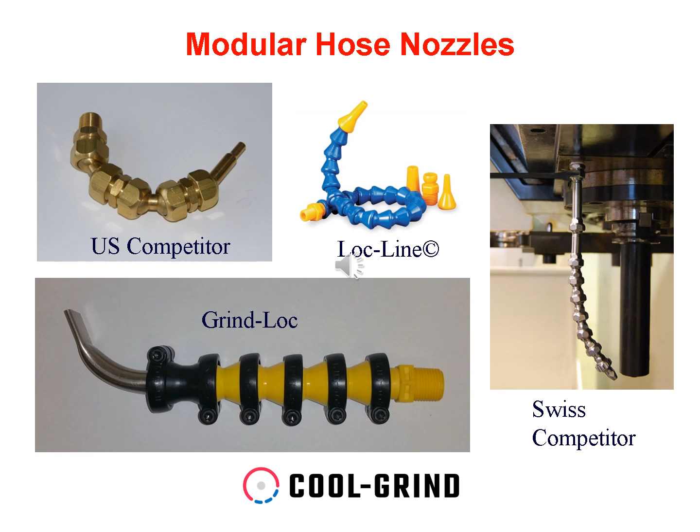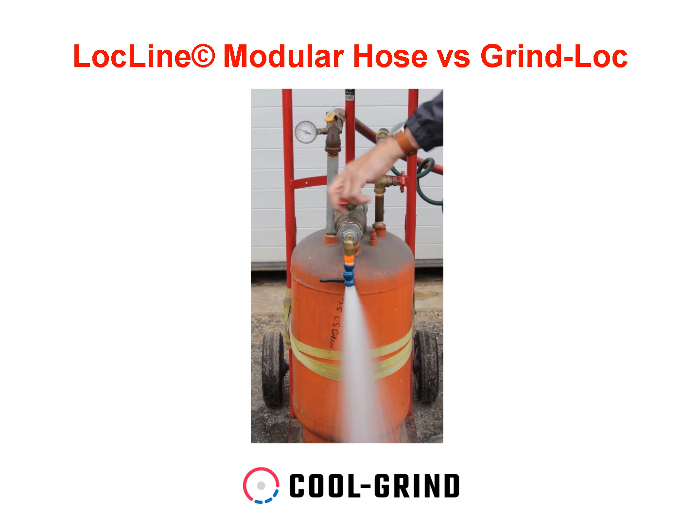Grinding machines tend to run at higher pressure than machining processes. So when you're trying to use LocLine on these machines, if you have a pressure, say, of 4 bar at the manifold, then you can have issues with the nozzle moving, or in the case of the example here, the nozzle came off. If we lowered the pressure to 2 bar pressure, you'll see what happens, and that's about 30 psi, and the nozzle tends to move, but it doesn't come off the machine.

You can get clamps for LocLine nozzles, which does significantly help the situation. Here we're testing now at 1 bar pressure, which is about 15 psi. And the nozzle does stay in position, so that's great, but at 4 bar there would be an issue unless you use clamps. The next product here is Grind-Loc, run at 7 bar, which is about 100 psi. And you see the nozzle does not move, it stays in position. But it's a smaller nozzle, so a bit of hard plumbing really helps.

This slide shows the range of nozzles available within the Grind-Loc Modular Hose system. There are now more nozzles than shown because we invent new products all the time. We've got a much bigger, wider nozzle, which is not included there. But you can see it's very modular, just like the LocLine.

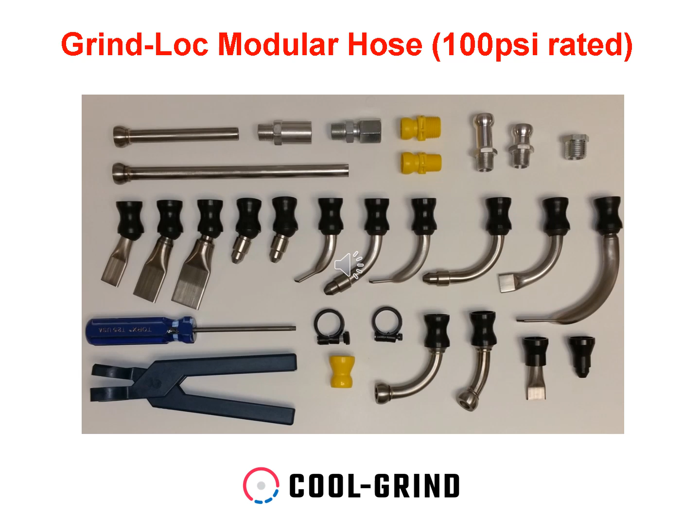When rigging nozzles onto a grinding machine, it's difficult to know exactly how many parts you need. And the Grind-Loc Kits allow you to have a lot of extra pieces there. This is a 15 nozzle kit. It has many adapters and steel pipes that can be put into a pipe bender, various clamps and threaded ends that you can go into the manifold, telescopes that allow adjustment for wheel wear, etc. And this is a much more convenient way to be in front of the machine and invent your solution.

This slide shows the before and after on a grinding machine. On the left-hand side, you can see LocLine coming out of the 6 ports. The nozzles were taken off by the customer because they created too much pressure and the nozzles moved out of the way. And the first joint was the one that was always moving because of the greatest torque as a cantilever.

In the middle view, you can see I've got hard plumbing and long extension tubes that go into the ports because in many machines, the wheel is in a very similar position and just needs fine tuning of the jets to hit the sweet spot on the wheel.

And the right hand view as well, you can see that we've got telescopes as well, so if the wheel pack changes and the spacers are changing, you can just push the nozzles in or out and get them in the right place. But it just shows you, and the stiffness as well from the hard plumbing makes a huge difference to the pressure rating.

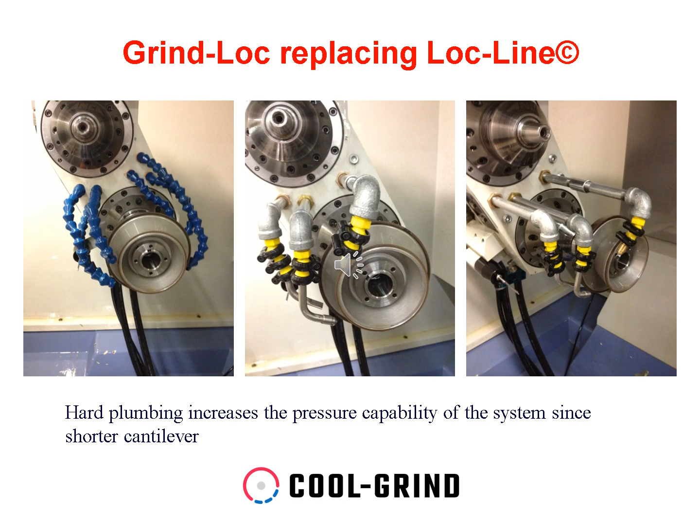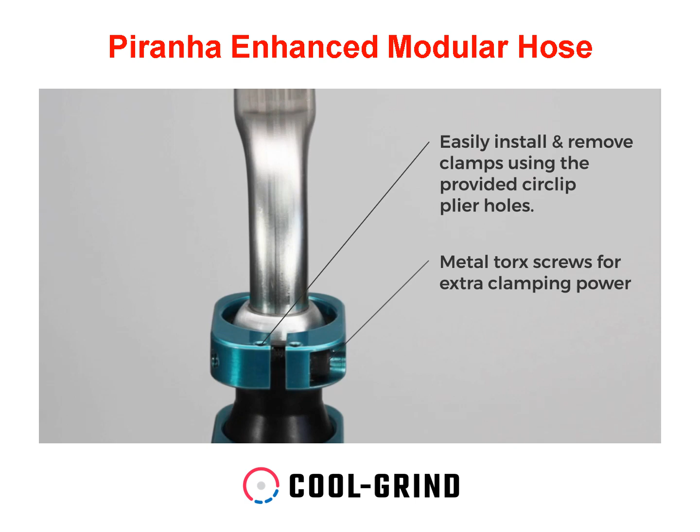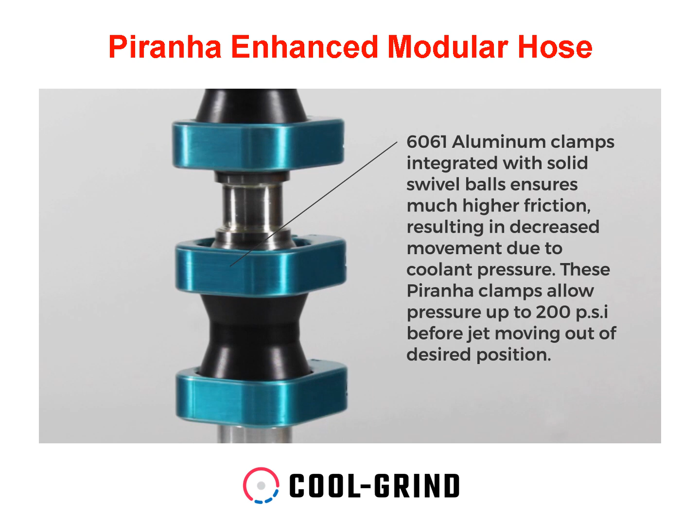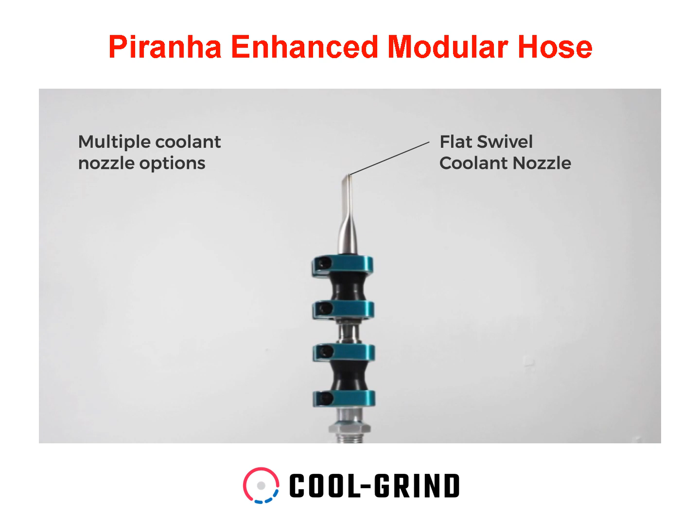Piranha is a high pressure version of Grind-Loc. You've got special metal clamps to give high clamping pressure, and up to 200 psi is available from the jet before it will move out of position. There's various nozzles that can be integrated into the Piranha system. They should have metal balls, and that's one of the features of the Piranha: the plastic black couplings onto metal balls give that high friction that gives you the higher pressure capability.

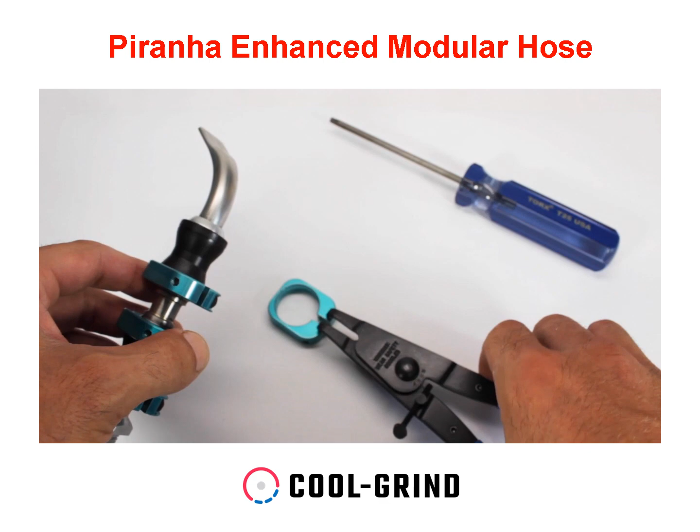Here you can see that a pair of circlip pliers are used to assemble the clamps, much easier than using your hands, and then the screw goes in. It's a Torx screwdriver, and then it's ready to fire up. You can see a very neat arrangement and very strong.

The donut system is a sub-manifold system. You can see it fitted to a cylindrical grinder. We have the hose coming in from the left into a right-angled elbow and into the donut assembly. There's an adjuster arm in this particular case to compensate for wheel wear.

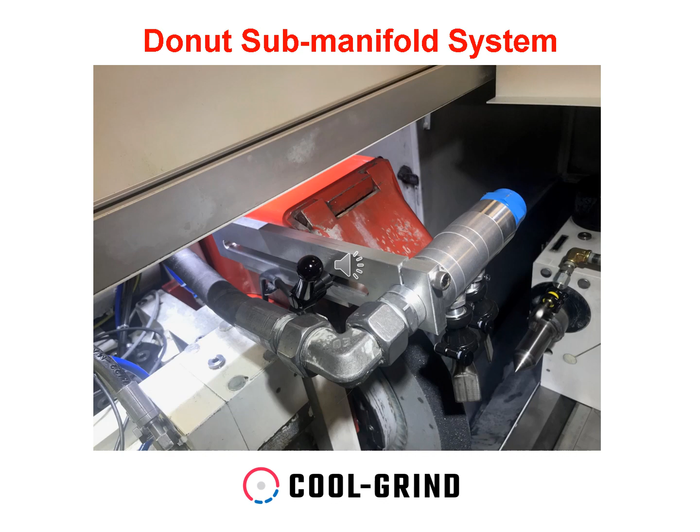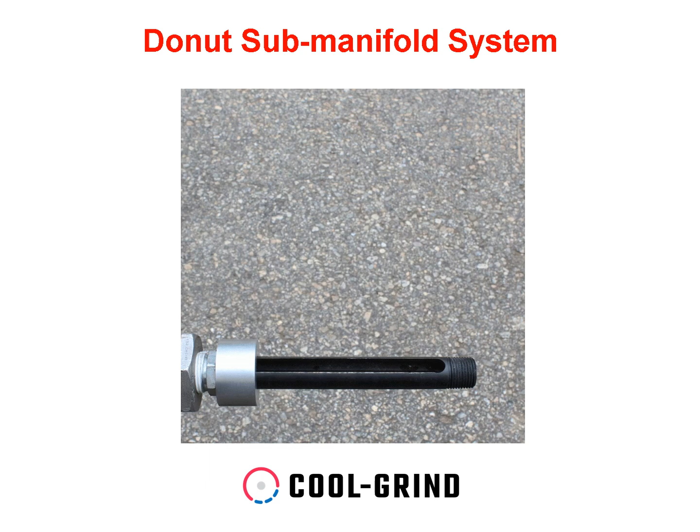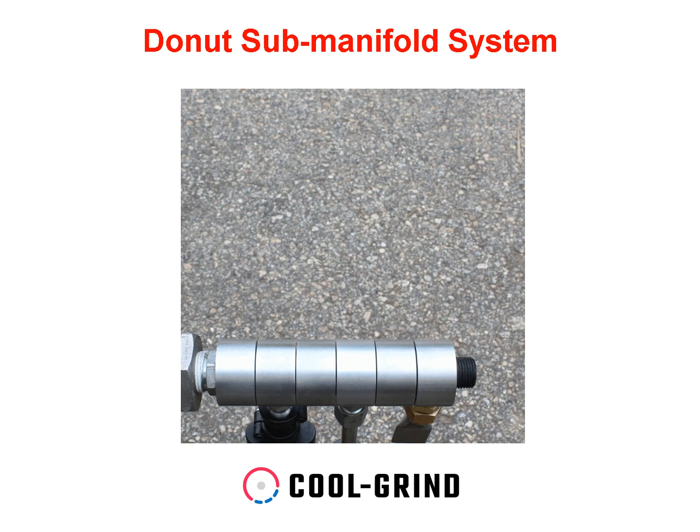The donut manifold system is based on a ported tube, the black item there in the photograph. That connects to a coolant port on the machine, and you can get multiple nozzles from a single port. You see here you have a spacer, then you might have an active donut with a nozzle, then another spacer, then another nozzle, another spacer, another nozzle, and at the very end the end cap seals and holds everything together and stops rotation.

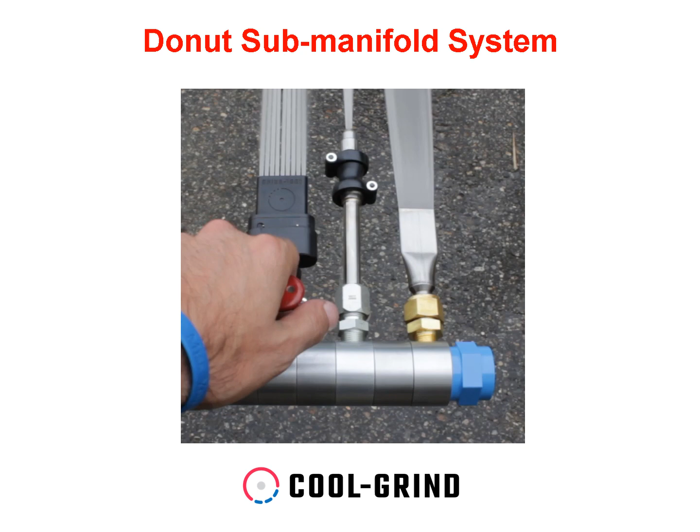The donuts have an internal annulus that allows flow from any direction of the ported tube relative to the nozzle. You see 3 different types of nozzles in this picture here, which are coherent jet nozzles, and you can adjust the spacing with half donuts and quarter donuts to get them exactly in line with the grinding wheel.

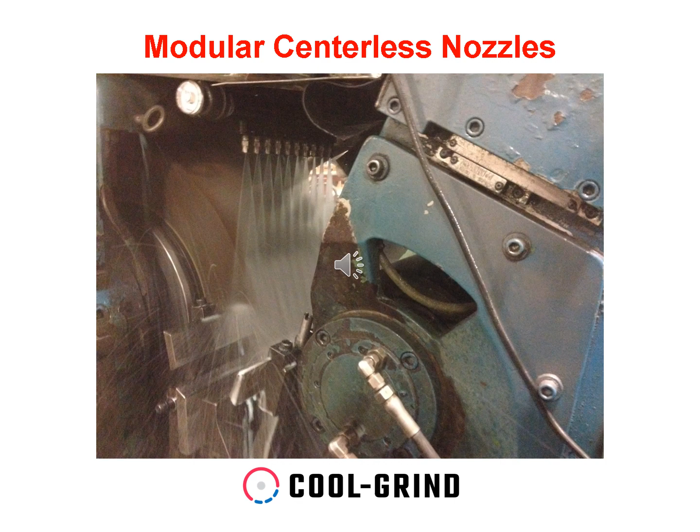We saw earlier the air barrier influencing the coolant delivery on centerless grinders because they're open machines. The modular centerless nozzles made by Cool-Grind are very frugal, so we don't have a high flow rate, but it increases the pressure from the pump to break the air barrier. And you can see here the fan-shaped jets, and they work very effectively and reduce the wheel wear and also the regulating wheel wear.

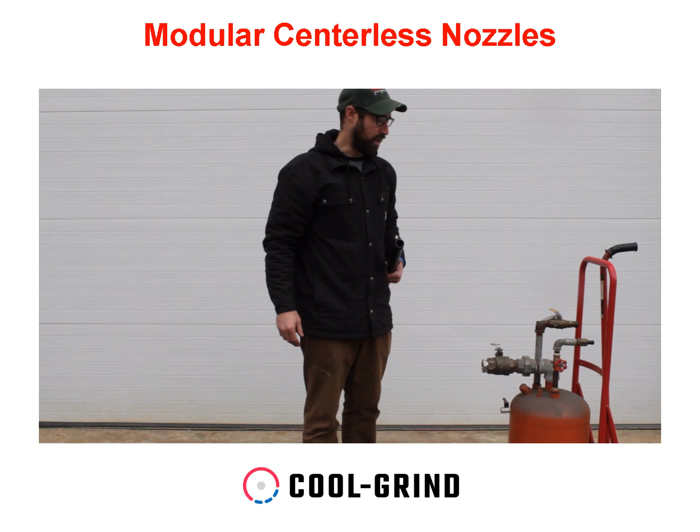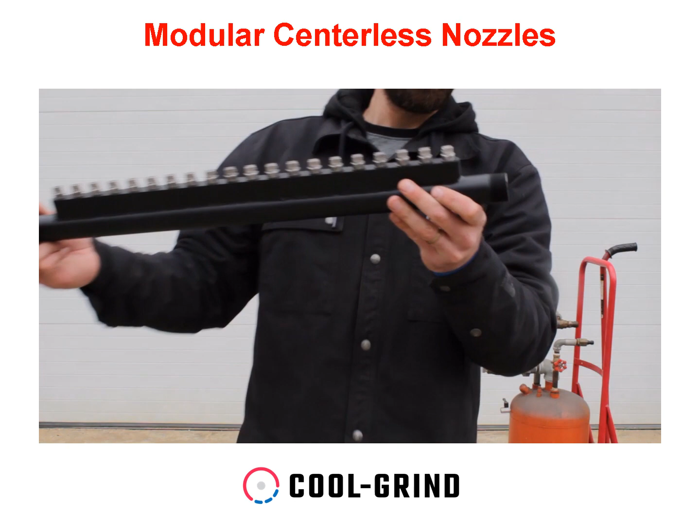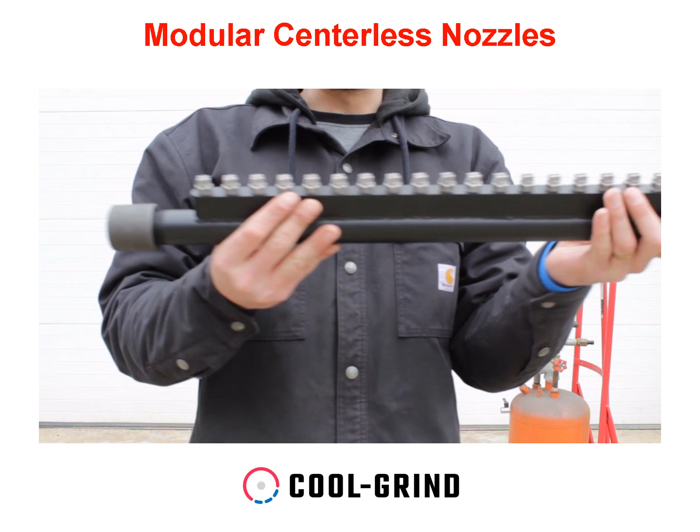I got the mobile flow testing tool here because I'm flow testing our centerless OD grinding nozzle. Now let me bring it in close so you can see it. This is our 20-inch version. These can go up to 24 inches and also down to 6 inches. And the cool thing about this one, we got the flat fan nozzles here, but we actually position them, we turn them slightly so that they do not interfere with themselves. That way you've got nice coolant coverage on the entire wheel.

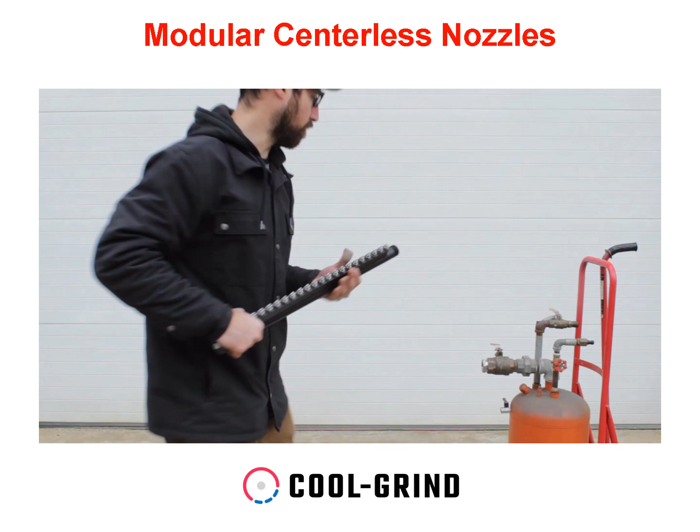So let me thread this on the flow testing tool here, like so. Very simply, thread it on. And now this is going to be positioned so that the jet will flow towards the camera, so I'm going to have to move that camera, or else it's going to be absolutely soaked, and I don't want to buy a new camera. Alright, I like the way that's nice and tight. So let me bring the camera in nice and close. I'll do an overhead shot so you can see those jets.

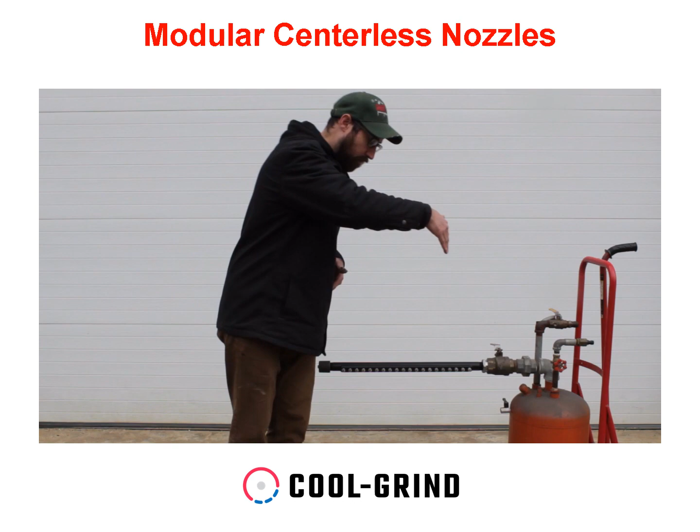So as you can see from that overhead shot, the jets really don't interfere with one another, which gives you excellent coverage on your grinding wheel. Now we tested that at 60 psi, and that's just from the pressure from the hose.

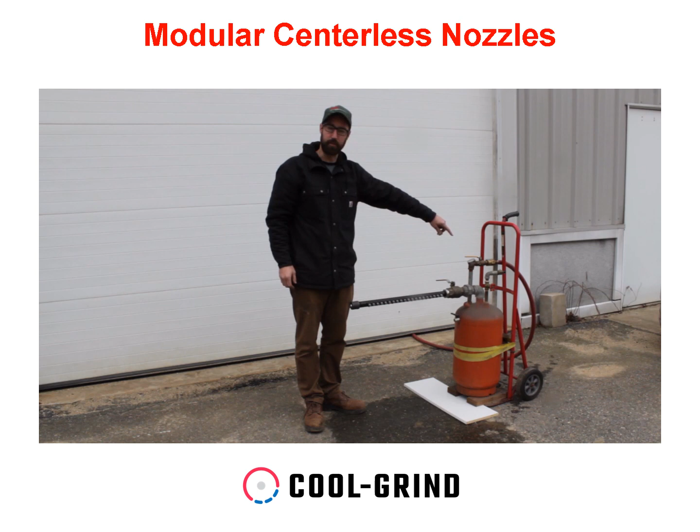The Slide-Loc system has similar attributes to the donut system. You can adjust the axial position of the nozzles relative to the wheel, but with Slide-Loc you can make much smaller changes, and it's also very easy to remove and add nozzles. The other advantage is the manifold controlling flow to each nozzle can be in a different position away from the grinding wheel, so it's a little bit more versatile.

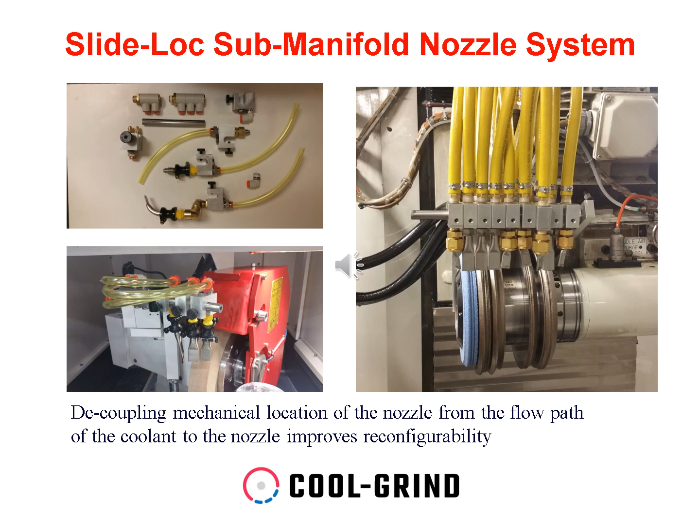This is a close-up of the Slide-Loc system showing how many nozzles can be fitted onto a keyed shaft. I say a keyed shaft because you've got a set screw on these Slide-Locs that allow you to lock the rotation of the Slide-Loc relative to that shaft, so they don't move around when the pressure comes on. But you can back off the set screw if you want rotation, then tighten up the knob.

You see here multiple types of nozzles, flat and round. There's an adapter here for one particular machine, but we have many other adapters that can be put into the existing adjusting arm, and then we create that keyed shaft ready for the Slide-Loc.

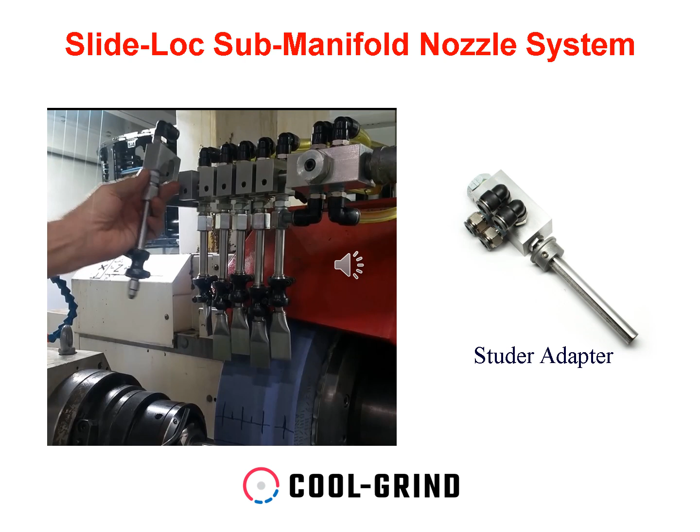Chamber-based nozzles are useful for surface grinding and creep feed grinding applications where the width of the wheel can change. We can select nozzles or deselect, plug nozzles and just have active ones. Whatever you need, you can configure an approximate profile of the jets.

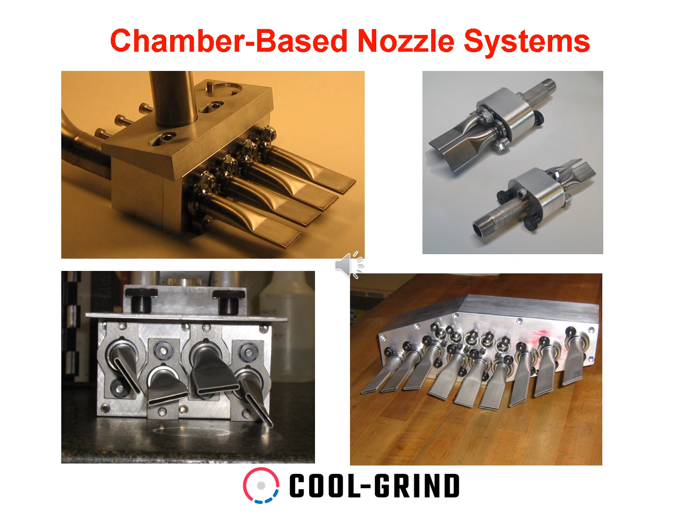Our chamber nozzles for cylindrical and surface grinding can incorporate on-off switches. The more pressure, the more they seal. The one on the far left in this view is always on because it's the one inboard for the flange of the wheel. And as you can see, very effective.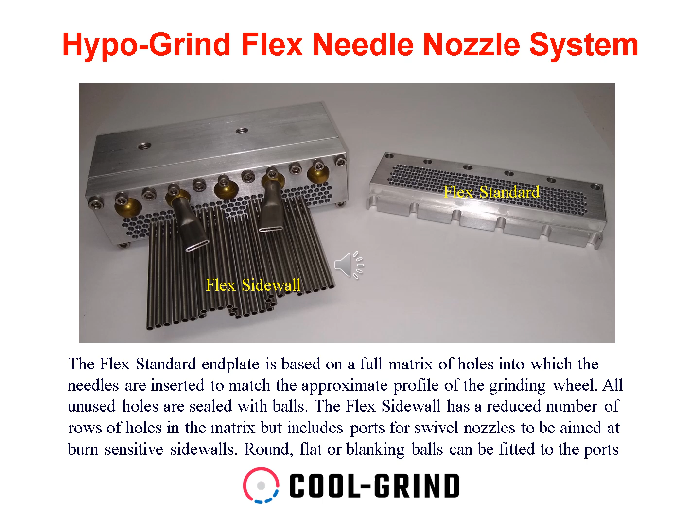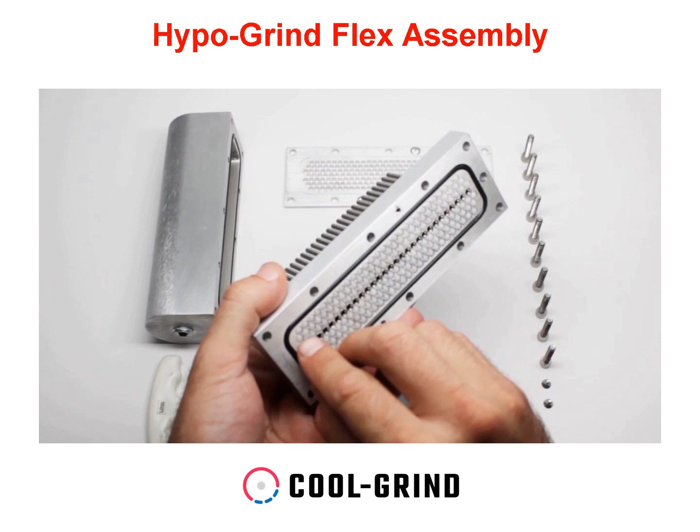This tutorial shows the assembly of the Hypo-Grind Flex nozzle for surface grinding and creep feed grinding. The end plate where we're assembling the needles into has a matrix of holes in a staggered array. Here you see us putting the final needle in of a straight nozzle, but it could be a profile nozzle, and sealing the additional hole with a Delrin ball.

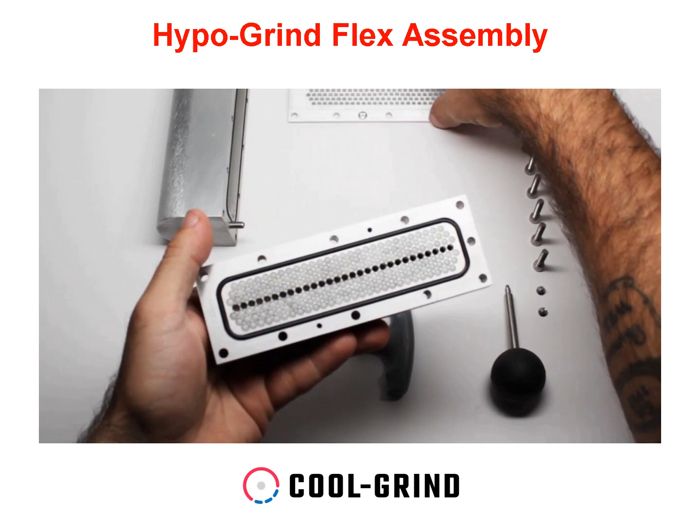The end plate can be locked with a special thin plate. So if you drop or accidentally knock the end plate and a needle would normally be pushed in again, this will stop that happening, making it a much stiffer setup if you make one dedicated for a particular wheel form.

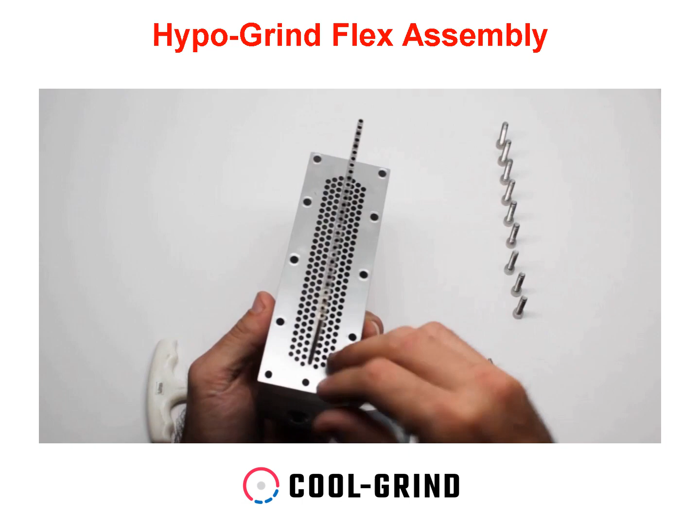The end plate with the locking plate is then assembled to the chamber. This design has many screws for manual connection, but there are other designs which are much quicker to assemble. You'd have a common chamber that stays on the machine, and the nozzle jets will be configured to the shape and offset of the wheel. So choose the widest possible wheel profile to select the correct flex end plate.

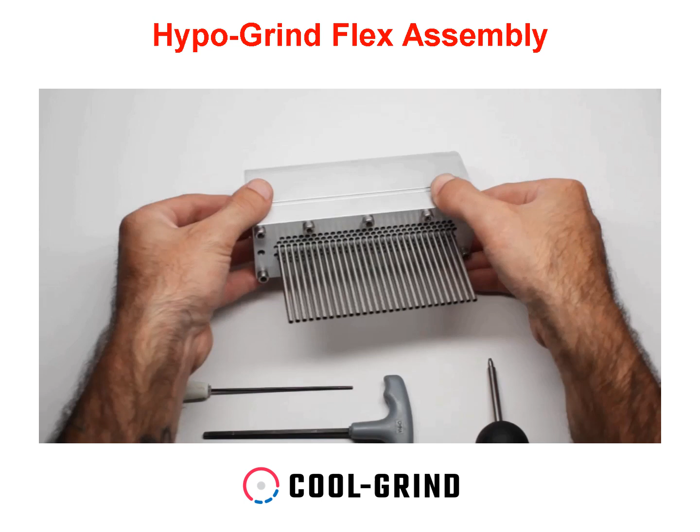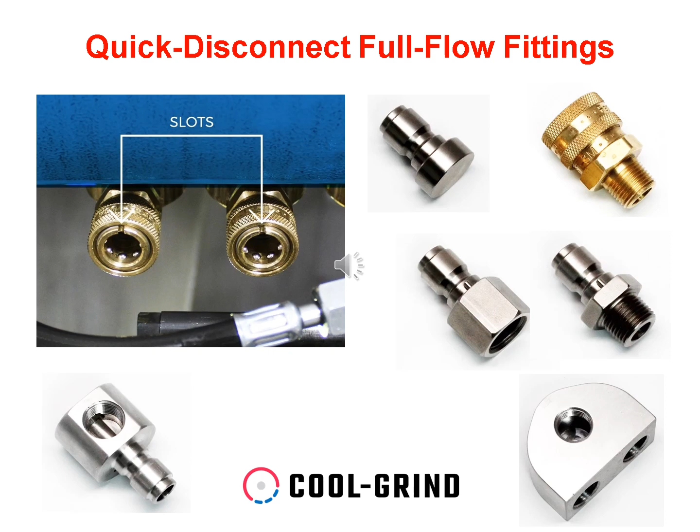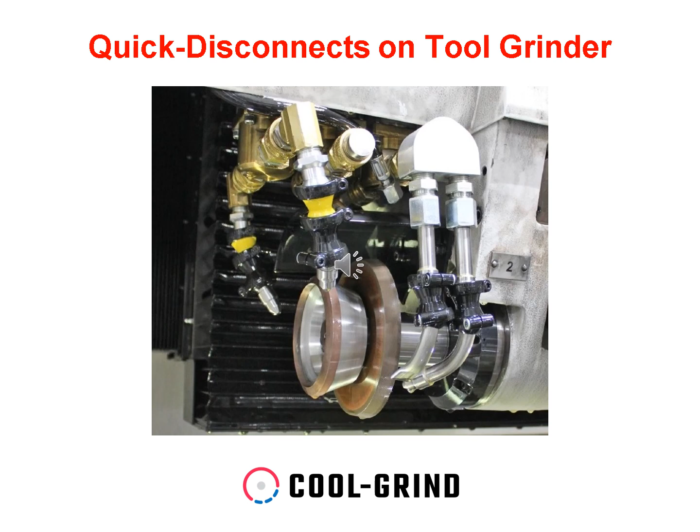We're flow testing the Cool-Grind needle nozzle. We've got 2 versions of this needle nozzle: the 1.5 inch and the 2 inch. We're going to be flow testing the 2 inch version today, because that has to go out to a customer. We want to make sure it's got the right coolant flow and meets the requirements we set, so the customer gets the best product.

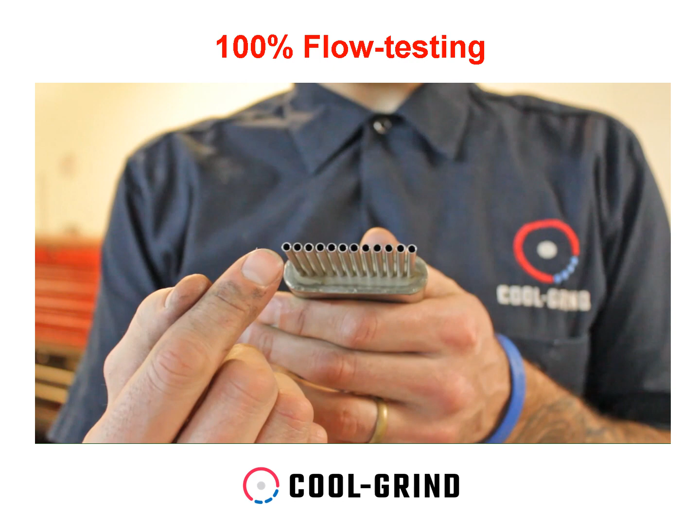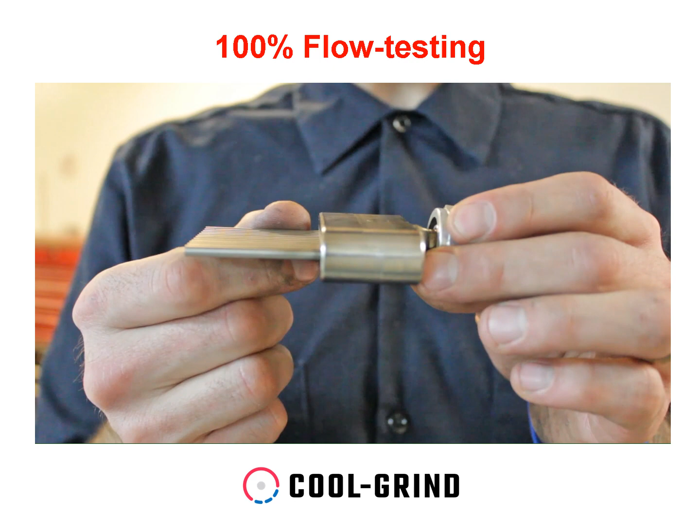That needle nozzle is this one right here. Let me give you a close-up of this Hypo-Grind needle nozzle. You can see here we've got 12 needles for coverage of 2 inches. You've also got a swivel ball here for any adjustments that need to be made while this is on the machine. This nozzle is compatible with our 1/2 inch nozzle tube system.

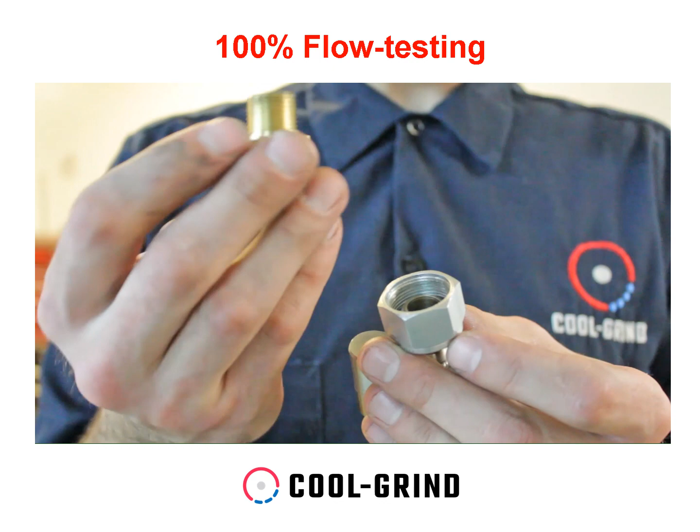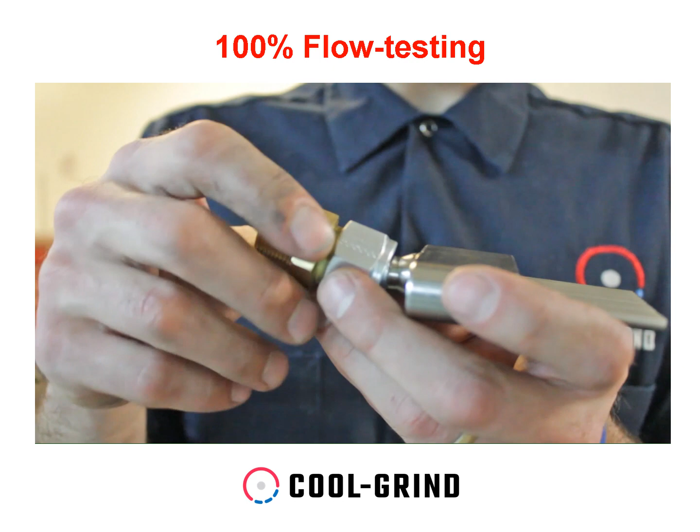We've got a female thread here that's 7/8-20. We have adapters that will convert this into a 3/8 male. This is also a compression fitting, so once you get the nozzle in the position you need, tighten it up and lock it into place.

Don't mind the dirty hands, this is my 50th flow test today. Tighten it up real nice. There you go, that's not going to move on you. So let's get this on the flow testing tool, like so. Righty tighty, lefty loosey, remember that. Make sure that's pointing at the drain, because if these 12 jets are spraying somewhere else, it's going to be a mess. Alright, let me tighten this up, I got my wrench here.

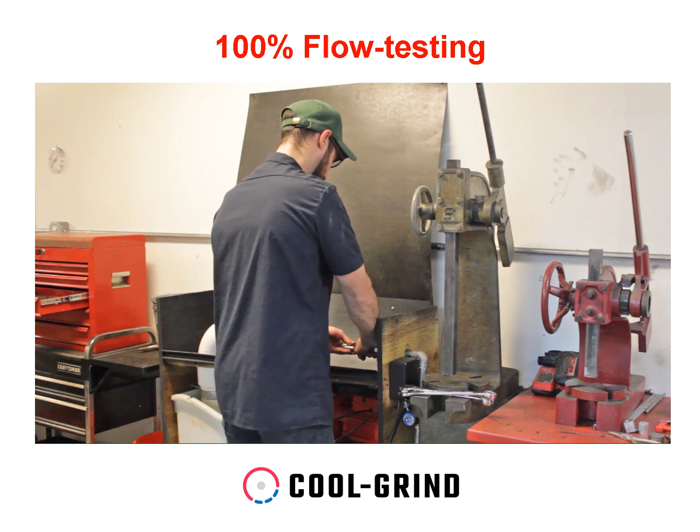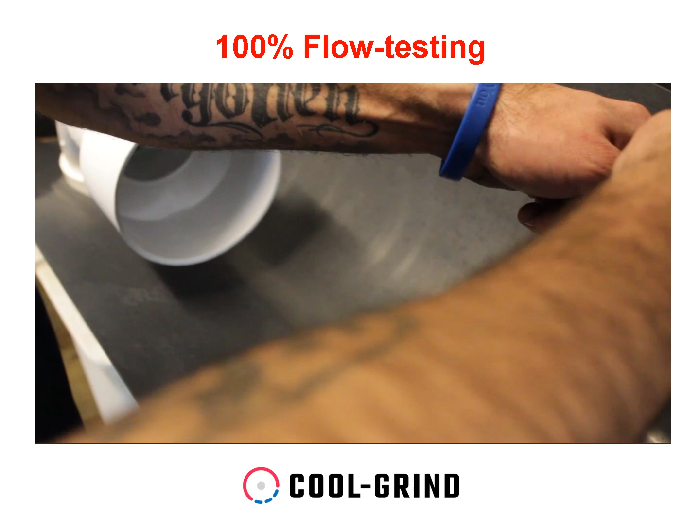Make sure it doesn't move on me. Alright, I like that. Let's do this, let's see what this looks like.

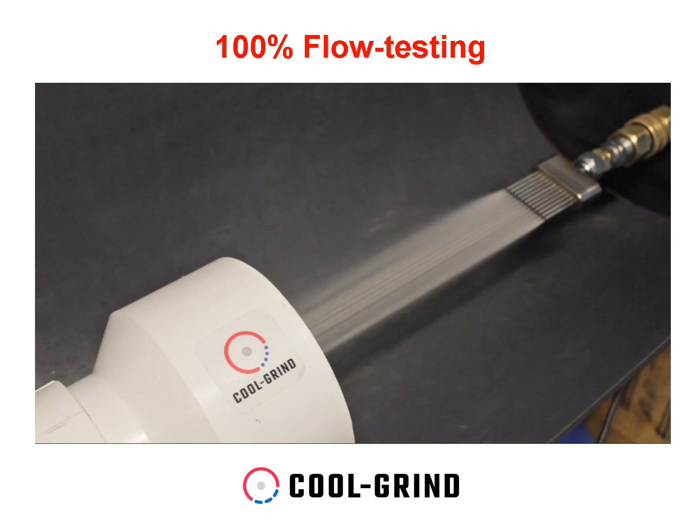So there you have it, the Cool-Grind needle nozzle, flow tested and approved. I'm happy with the results, I didn't see any blockage. Really what I'm looking for is any blockage in any one of these jets, and all 12 had good flow. So we're going to pack this up and ship it out to the customer. Thanks for watching, everybody.

A modified laser bore sighter is used to aim the nozzles on the grinding machine. It's a lot quicker to do it dry with the laser than to start the wheel, clean the window, etc, so it's a lot less messy. Minimization of flow rate is more achievable when you get the jet in the right position, and also lower scrap rate because the first part is perfect. Your part precision can also be increased by minimizing the flow rate. The Cool-Grind nozzles are very precise, so the laser gives exactly the position where the jet would go.

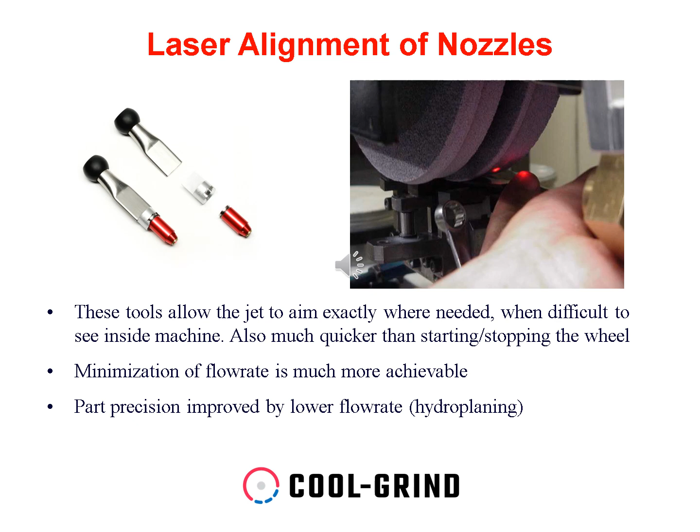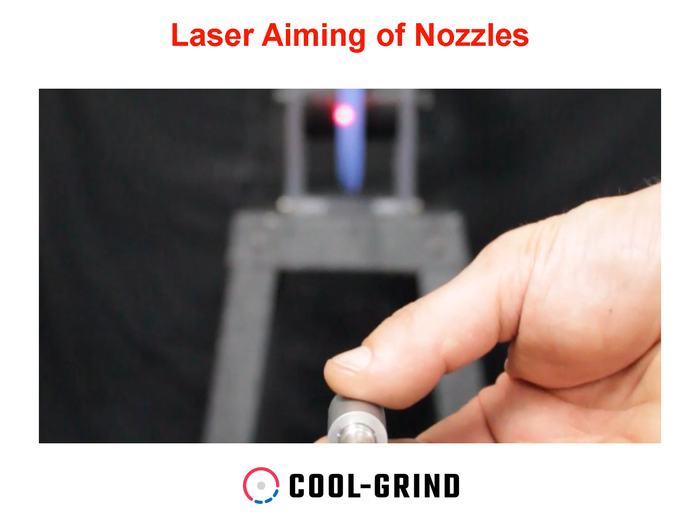In this video we have a grinding wheel which is about 6 feet away from the nozzle. The nozzle is one of our coherent jet round designs with the fire hose profile. The laser fits on the outside of the nozzle, and then we switch the coolant on. You can see, very precise, that's 6 feet away, and it hits exactly the middle of the wheel.